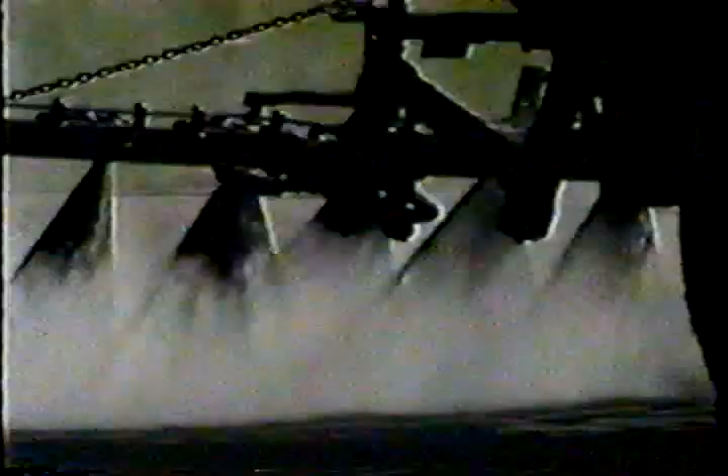For almost as long as there have been roads, there have been professionals responsible for maintaining those roads. Road agent, road supervisor, pavement manager, whatever the title, it never has been an easy job. Though our understanding of how to build better roads has increased and technology has advanced, today's road superintendent faces all of the maintenance problems of his predecessors, plus the pressures of ever-tightening municipal budgets.

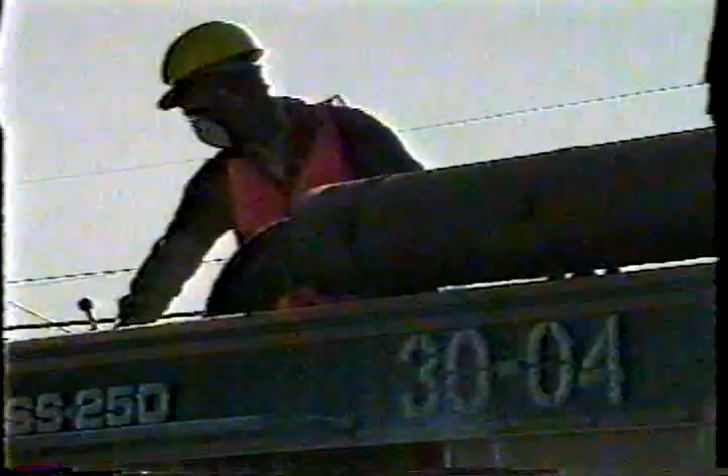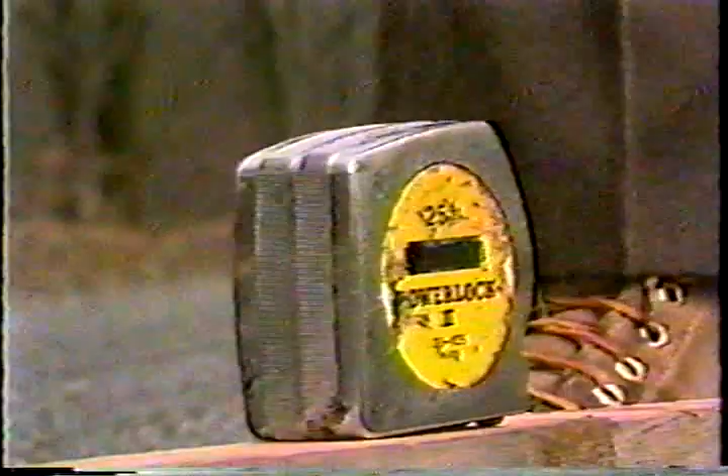To his advantage, he can call upon powerful, sophisticated time and labor-saving tools such as the road reclaimer, high production profilers, the automated paver, and the tape measure. That's right. The humble tape measure is one of the simple instruments vital to the latest road management systems. And these road rating programs are really powerful tools. They provide many benefits to the town while helping the road supervisor perform his job more efficiently.

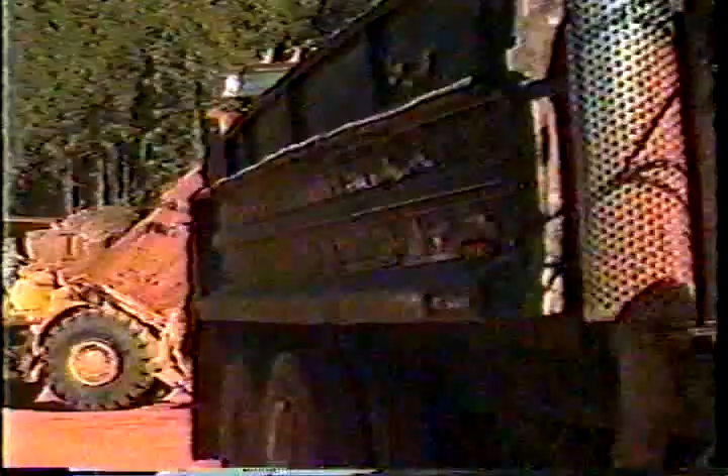Check. I think we have to measure the depth of it so we can get the severity. An inventory of your road system eliminates guesswork. You have a record of every mile of road, and you know what its condition is. You get the information you need to anticipate needed repairs and improvements in your road system. That enables you to make repairs in a planned, cost-efficient manner.

Maintenance needs are documented in specific numbers. You can demonstrate to town officials where road problems exist and project what they will cost to repair. That allows you to determine a total budget to repair all problems or to show which repairs will be deferred if the budget is cut.

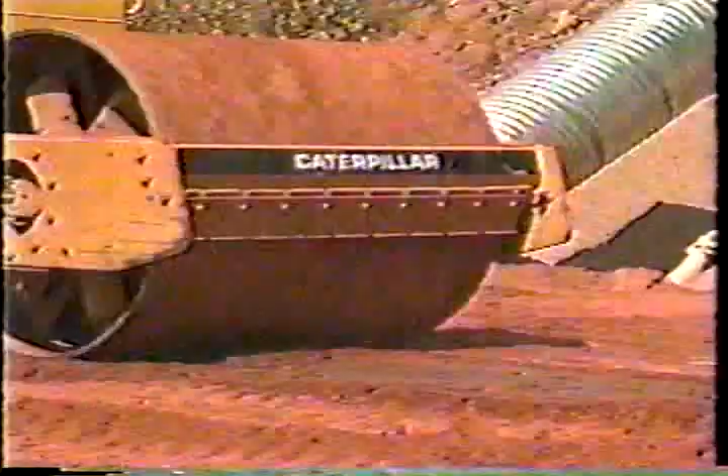Established logical maintenance plans for the whole road network will allow you to resist pressure from individuals who want their road fixed first. Should town officials be sued due to an accident caused by a road maintenance problem, the courts are less likely to award damages when the town is following a documented road maintenance plan. So road management systems make sense for many reasons.

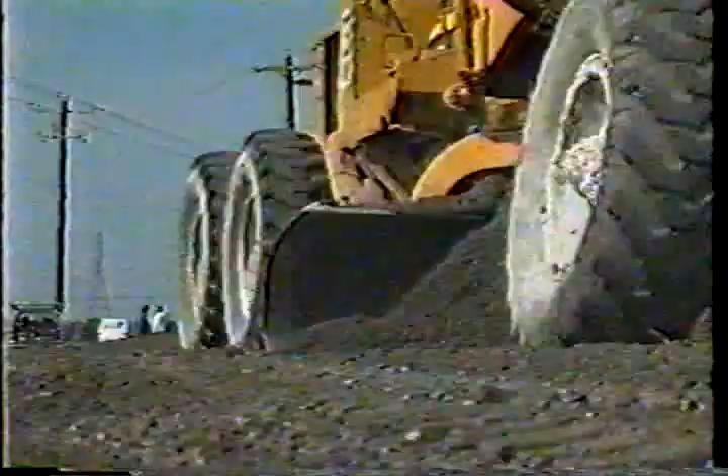But what's involved in putting such a plan together? There are several steps to be followed carefully, and a nominal software charge, but nothing terribly difficult. The rest of this tape will show you how to use a management system for unsurfaced roads that has been developed by the U.S. Army Cold Regions Research and Engineering Laboratory. It's called the Unsurfaced Roads Management System. The field manual, Rating Unsurfaced Roads, will give you even more detail if you decide to use the program. At the end of this video, we'll tell you how to get more information.

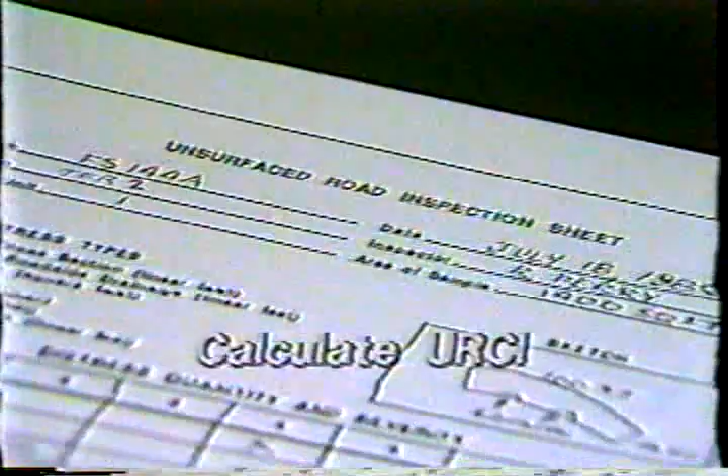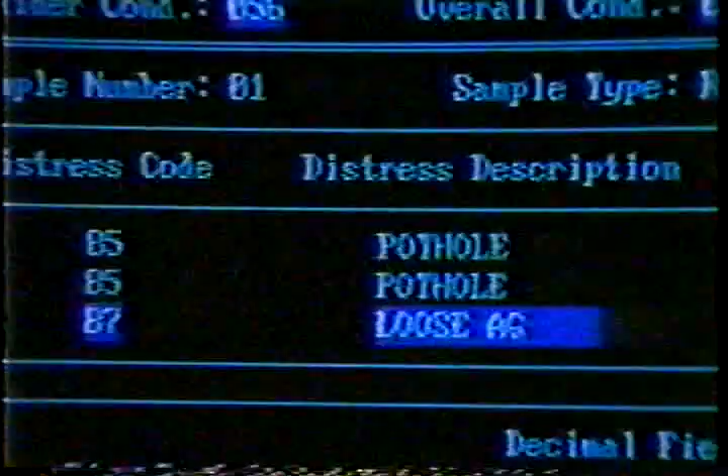In a nutshell, here's how the program works. First, roads are divided into representative sections called sample units. Next, all the problems within these sample units are measured and noted. Then, with these measurements as a basis, a few simple calculations yield a number for each sample unit called the Unsurfaced Roads Condition Index, or URCI. Usually, the superintendent's role is to choose the sample units and do the calculations. The road crew does the actual measurements.

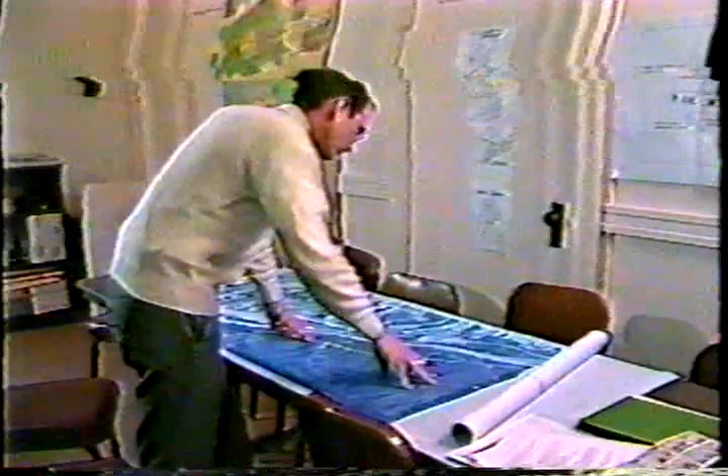Now, let's take a closer look at the process. First, we need to choose our sample units. This step takes some patience. It must be done carefully, but it's only done once since these same sample units will be studied yearly. Start with a map of all of your roads. To make sure that the sample units are truly representative of all of your roads, we will go through a three-step process.

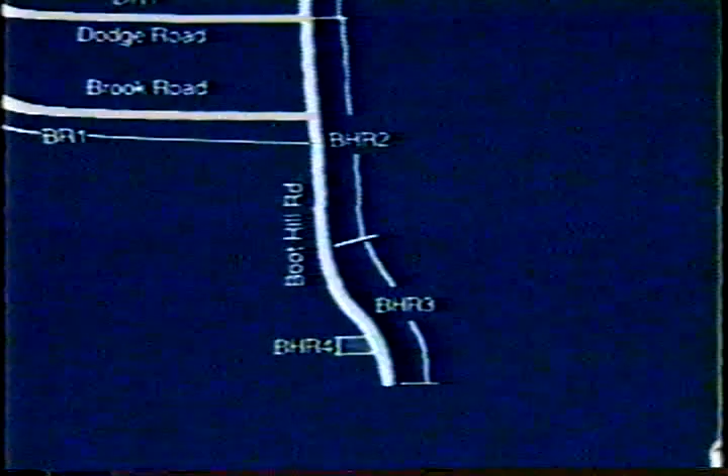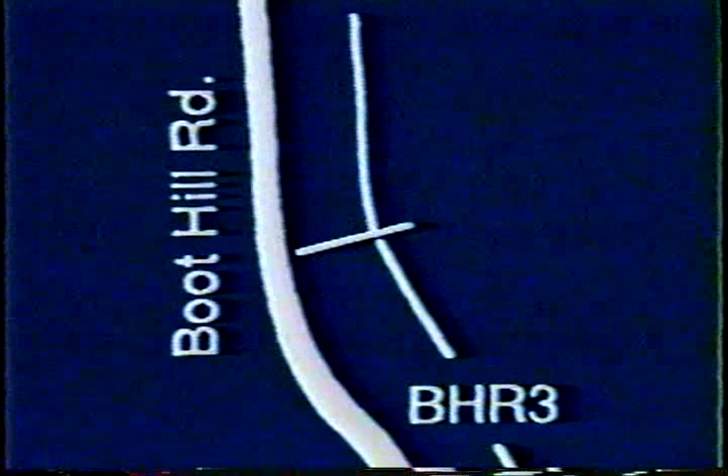First, branches. Divide your roads into major recognizable units. In many cases, these will be entire roads. Identify branches with existing names whenever possible. Here we call Boot Hill Road BHR. Next, sections. Sections are parts of branches where road conditions are uniform. For example, Boot Hill Road shows 4 sections.

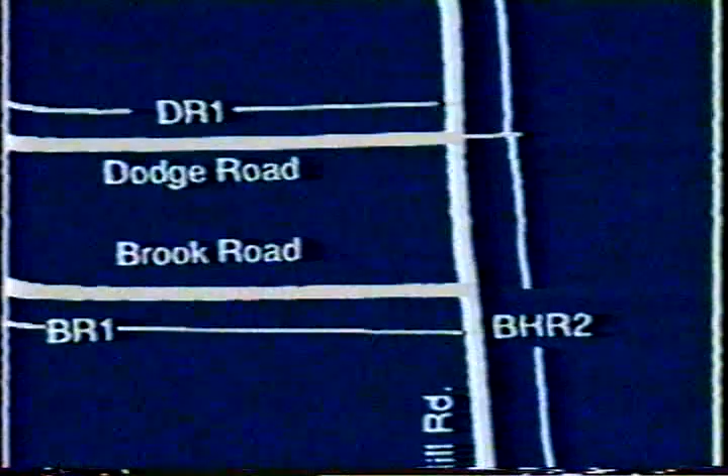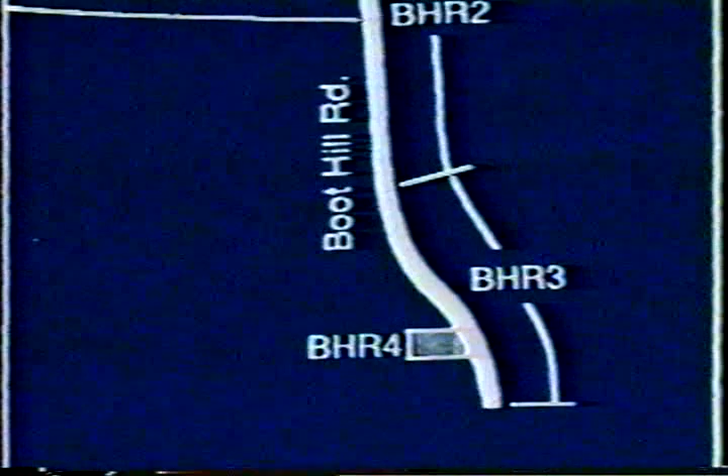BHR 1 is a mile-long gradual hill, pretty much the same throughout. After the intersection with Dodge Road, there is less traffic, so we call it BHR 2. BHR 3 has still different characteristics because it runs through a poorly drained area, and BHR 4 is a parking area for the town pond. Once you've chosen the sections, label them clearly on a map.

Finally, we divide the sections into sample units, where conditions will be studied. In general, sample units are about 100 feet long, and you will want to take detailed distress measurements on about 2 of these per mile. Mark your sample units well, both on maps and with permanent stakes at the site.

This stretch of BHR 3 has a problem with potholes, so we chose a sample unit that includes some of the potholes and some of the good road. The field manual will give you more details about making these divisions.

With all sample units selected, mapped, and marked, measurement may begin. As with any scientific procedure, consistency is vital. Be sure that your crew understands the importance of their surveys. Observations should be made at the same time each year, when the roads are in their best condition, and data must be gathered in a consistent fashion from year to year and from crew to crew.

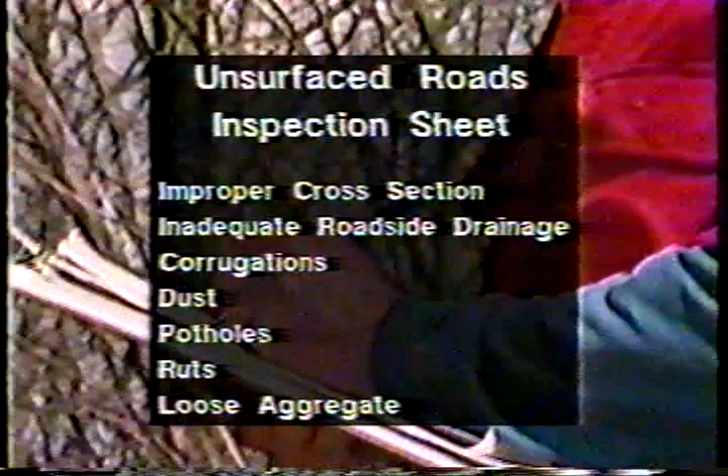As the crew makes measurements, they fill out an unsurfaced road inspection sheet. They will measure 7 distress types for quantity and severity. With this information, you will be able to calculate a rating called the Unsurfaced Road Condition Index for each sample unit. This index, based on careful measurement, gives you an easily understood profile of the condition of each road. The calculation may be done manually or with a computer program called PAVER.

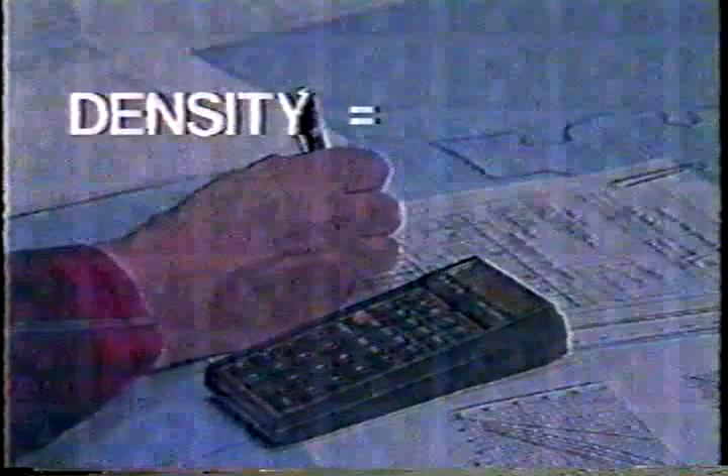To perform the calculation manually, refer to the unsurfaced road inspection sheets turned in by your crews. Start by determining density of each distress type. Divide the amount of the distress by the area of the sample, then multiply by 100. Here you have 100 linear feet of improper cross-section, and the total area of the sample unit is 1,800 square feet, so the density is 5.6.

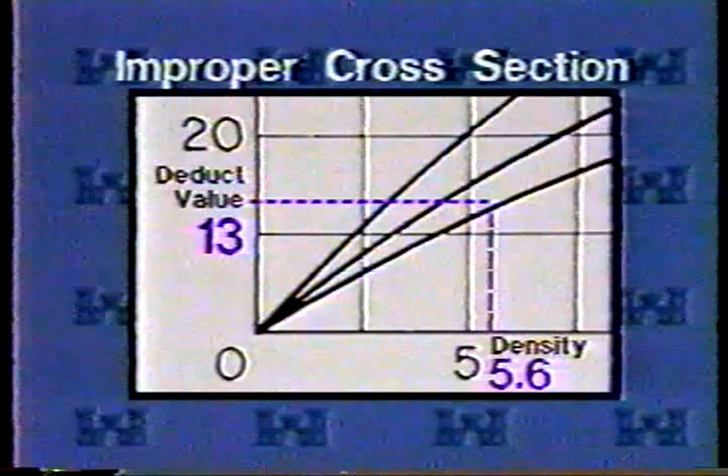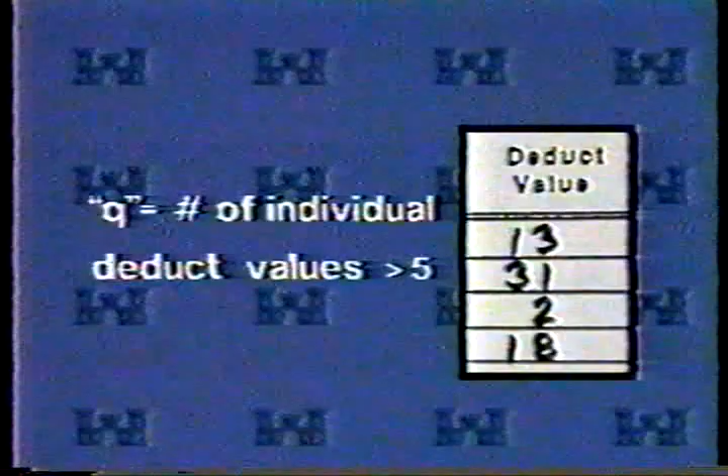Next, refer to the curves in the field manual for each distress type. An improper cross-section of low severity with a density of 5.6 yields a deduct value of 13. When you've determined all of the deduct values for the sample unit, add them to get the total deduct value. Here it's 64. The number of individual deduct values greater than 5 determines the Q value. Here we compute a Q of 3.

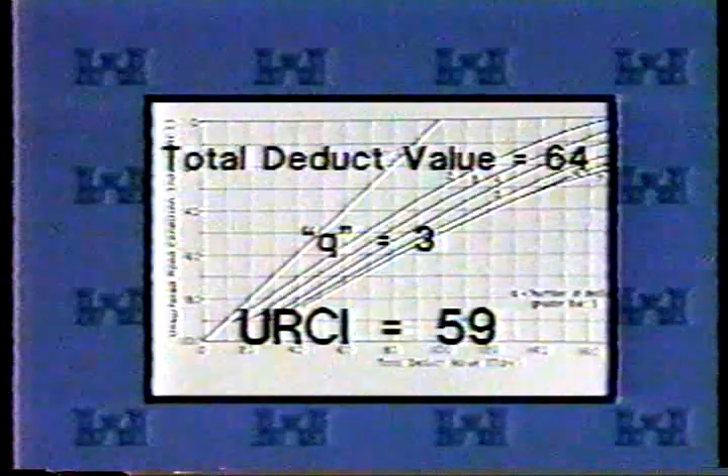Relating these two figures to the URCI curve, we find an unsurfaced road condition index of 59 for this sample unit. A section total is the average of all the sample units in the section, and the rating for the whole system is the average of all sections. See the manual for more detail.

Now, how do we utilize this figure? Well, you may use the URCI to develop priorities for maintenance. If you set an overall target index of 65 and your current rating is 50, you can use the index to determine which roads you should improve with available funds. Since all improvements will probably not be completed this year, the data is useful in justifying next year's budget. The index also gives you a basis for projecting future requirements and tracking road deterioration with time.

When the program has been in place for 2 or 3 years, you will know what maintenance practices work best on your roads and what they cost. This data will make budget forecasting easier and more accurate. These are just a few of the ways that this management tool will help you to do your job better. As you become accustomed to using the system, other benefits will become apparent.

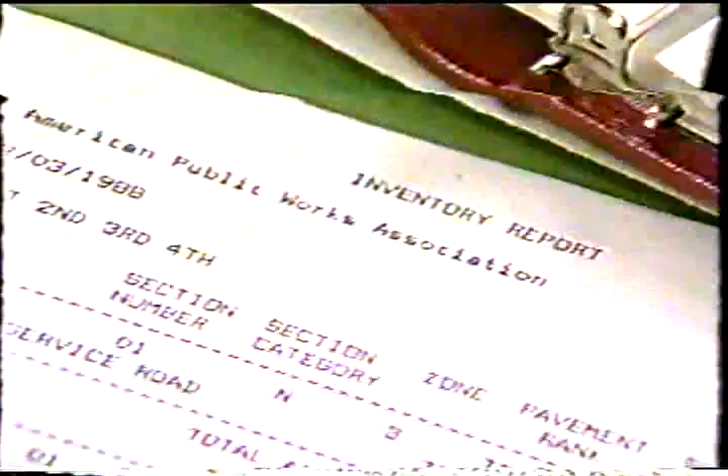The best way to keep ahead of road problems is to use a pavement management system. This videotape will show you how to take measurements for the Unsurfaced Roads Management System. It's a tool that will help your road department actually see into the future. Road maintenance will be planned more precisely. It also helps you to be more efficient on a daily basis and tracks the information needed to show townspeople that you're doing the best job possible. The system is the product of several years of research and development by the U.S. Army Cold Regions Research and Engineering Laboratory.

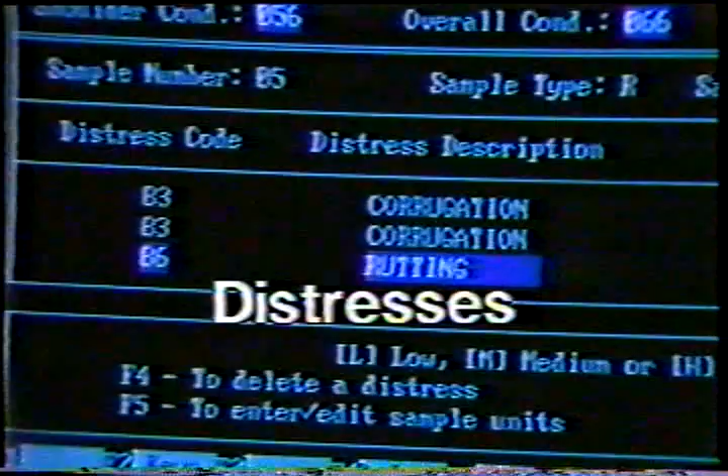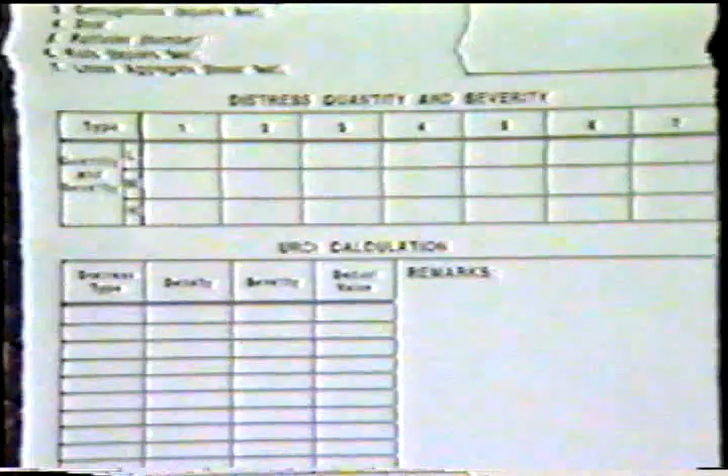Your accurate measurements are the most important part of the system. In this tape, we will show you how to measure and record 7 road problems called distresses. This field manual will be an important guide for you. In the back of the manual is an inspection sheet. This is the form you'll use when you measure the distresses. The areas where you will make measurements, called sample units, have been marked for you.

Your inspection involves measuring all of the distresses in the sample unit. They are improper cross-section, inadequate roadside drainage, corrugations, dust, potholes, ruts, and loose aggregate. Let's look at the proper measurement procedure for each of these.

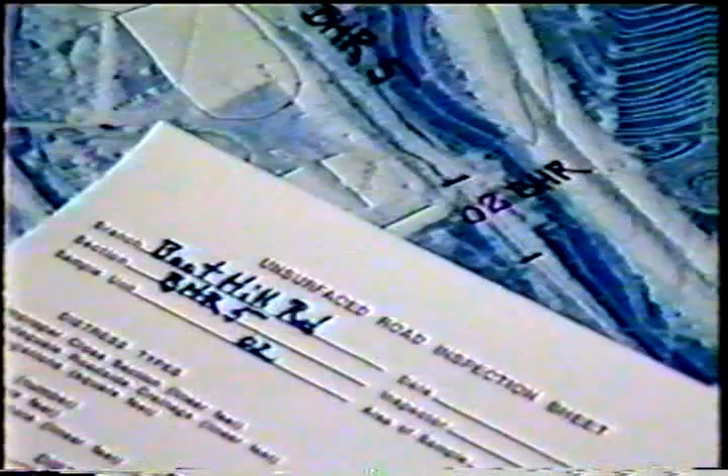Start by filling out the information at the top of the inspection sheet. You'll find the branch, section, and sample unit information on a map that's already been prepared. Be sure to fill in your name and the date. Then start by measuring the area of the sample unit. That's the length times the width from one shoulder break to the other. Make an overhead sketch of the unit showing areas of problems and road features such as culverts.

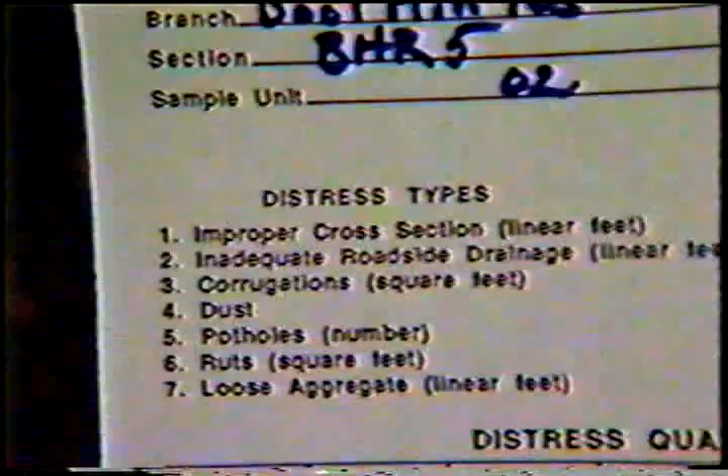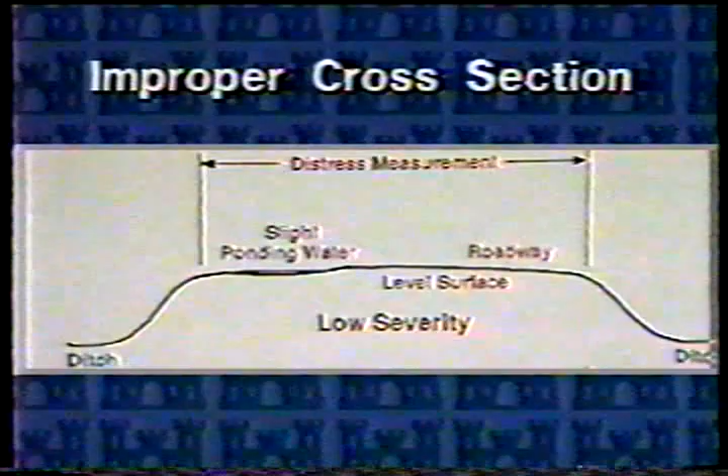First, let's look at improper cross-section. As you know, a proper cross-section looks like this. It has sufficient crown, or bank on curves, to carry water to the ditches. Even a slight ponding of water indicates improper cross-section. Here, the road surface is level, and there's evidence of a small amount of standing water on the surface. This is called low severity.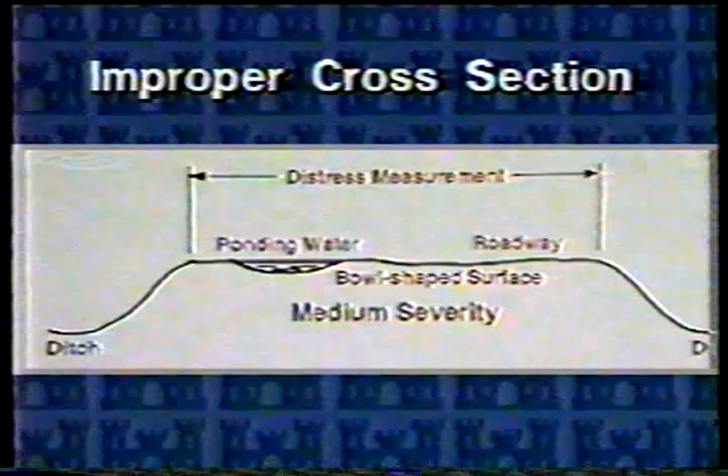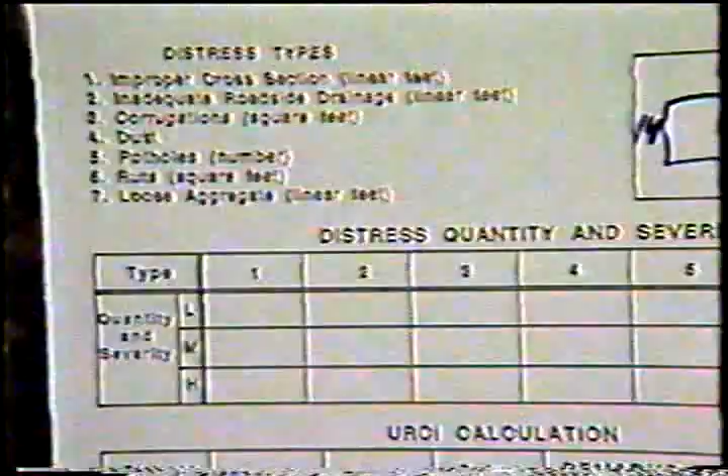When there's a slight bowl shape or evidence of a moderate amount of standing water, we call it medium severity. Evidence of a lot of standing water or the presence of severe depressions puts it into the high severity classification. To measure improper cross-section, use a straight board. This is medium severity. The critical measurement is the number of feet of each level of severity. Here, the sample unit has 40 feet of medium severity and 20 feet of low severity.

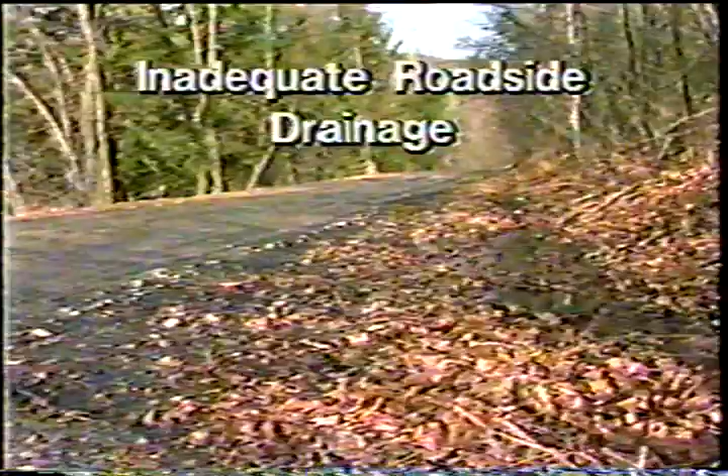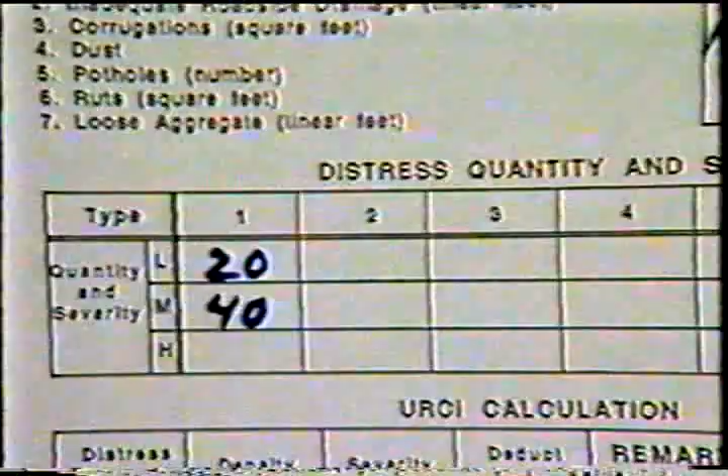Next, we look at inadequate roadside drainage. When ditches and culverts fail to carry runoff, pools form alongside the road. The presence of these pools can weaken the road, or they may drain across the road carrying surface material away. Look for ponding of water or evidence of ponding water, and also for overgrowth or debris in the ditches. Again, you need to record the length of the problem in feet. This sample unit has 15 feet of medium severity, and beyond that 30 feet of low severity. Refer to the field manual for help in judging severity level.

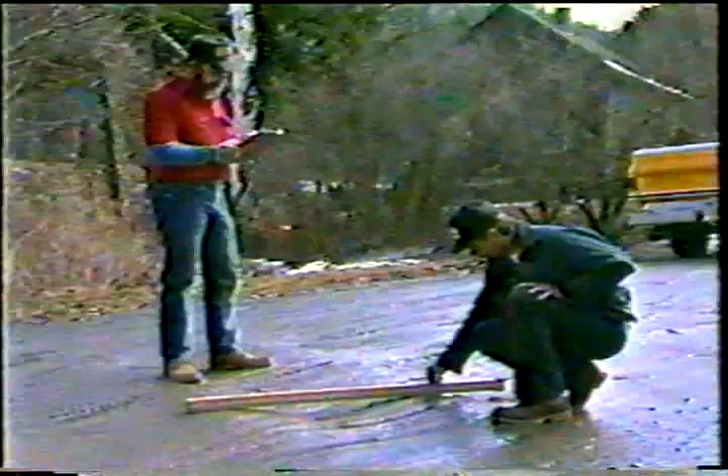Number 3 on the inspection sheet is corrugations, or washboarding. We measure these by putting a straight board across the top and measuring depth. Severity is indicated by the distance between the high and low points of the corrugations. Record the area in square feet at each level of severity. This sample has 126 square feet at the medium severity level.

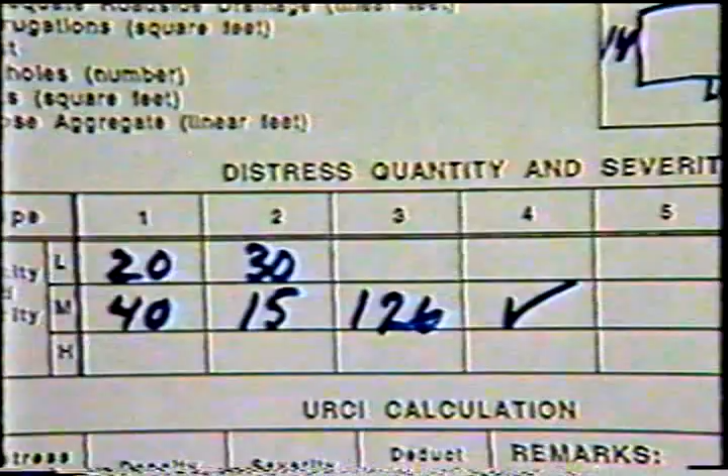To measure dust, just have someone drive through the sample unit at about 25 miles per hour and observe the dust cloud. This sample has a medium severity. This is a single rating for the whole sample. Check the appropriate box.

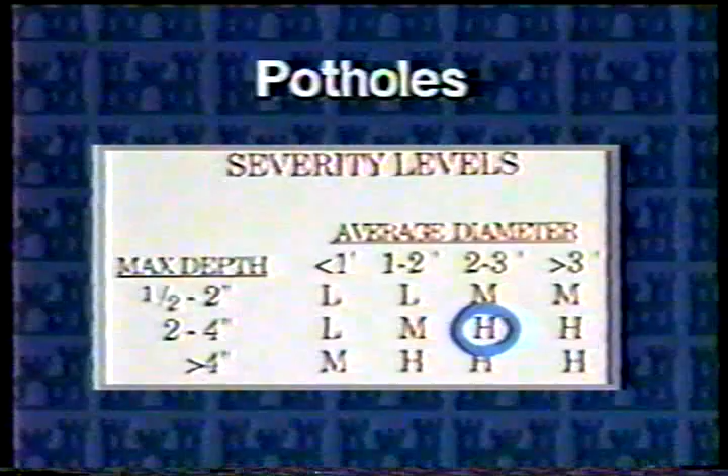Potholes are a familiar sight. First, measure their diameter and depth. This one is 3 feet in diameter by 3 inches deep. Next, refer to the table in the field manual to determine severity. So, here we get 1 at high severity. Record the total number of potholes for each severity.

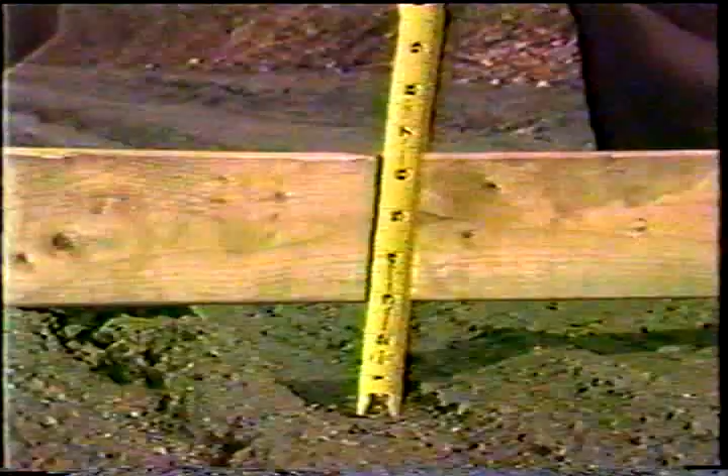Again, using our straight board and tape measure, we classify ruts. These ruts are about 3 inches deep, so they're of the medium severity. And with a dimension of 4 feet by 10 feet, we record a total area of 40 square feet in the medium column. If there are ruts of any other severity, we record the total area of those as well.

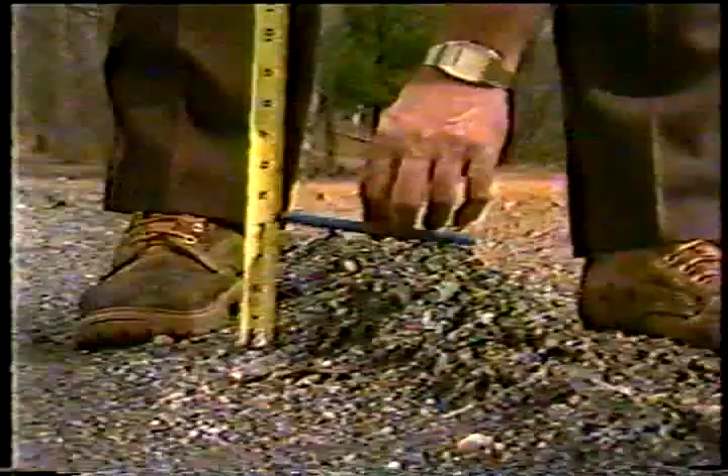Finally, loose aggregate is the rock, sand, or soil that builds up into ridges along the center or sides of an unsurfaced road. The height of the berm is the key to its severity. Measure this, check the table in the manual, and then measure its length. In this case, the sample has one berm at medium severity, 20 feet in length.

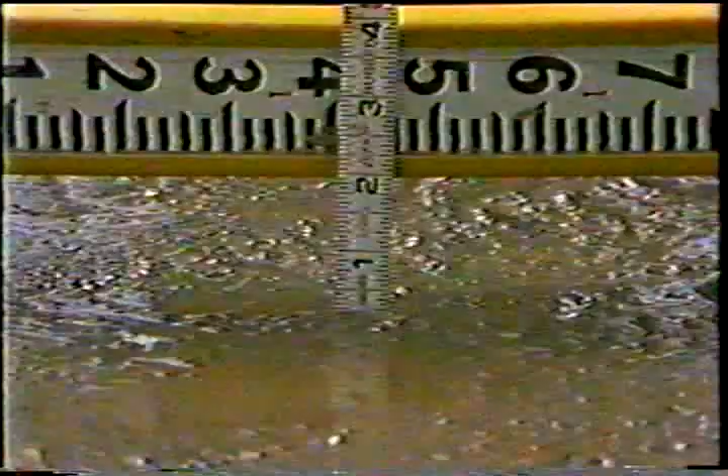You'll no doubt run into situations where it'll be difficult to tell which distress is which, or several may occur together. A sample with improper cross-section may also have potholes and ruts. In this situation, use your best judgment. Decide which is which, and then measure each distress separately. The system is flexible enough to give an accurate rating under most circumstances. With experience, spotting the different problems will become much easier.

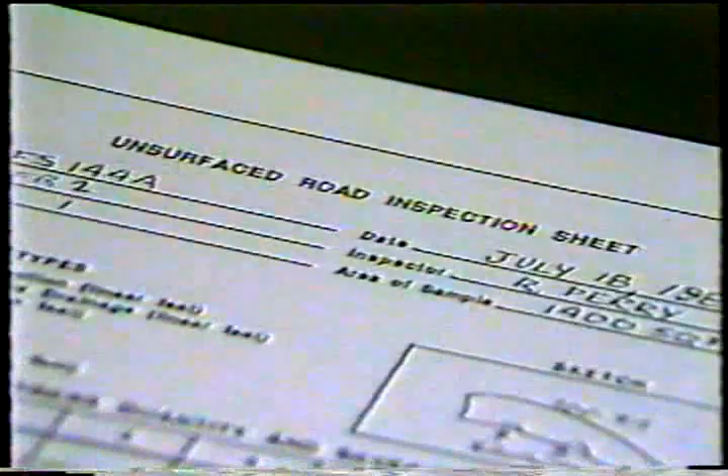That's it for measurements. Your numbers will now become the basis for calculations to be performed back at the office. The final result of this process is a solidly based maintenance program. The importance of your careful measurements can't be overstressed. With your help, the Unsurfaced Roads Management System will provide the information needed to maintain and improve your roads at the lowest cost. Instead of reacting to the disasters that Mother Nature, Father Time, and your unpaved roads cook up for you, you'll have a sound maintenance plan to refer to year-round. That's a goal worth working for.

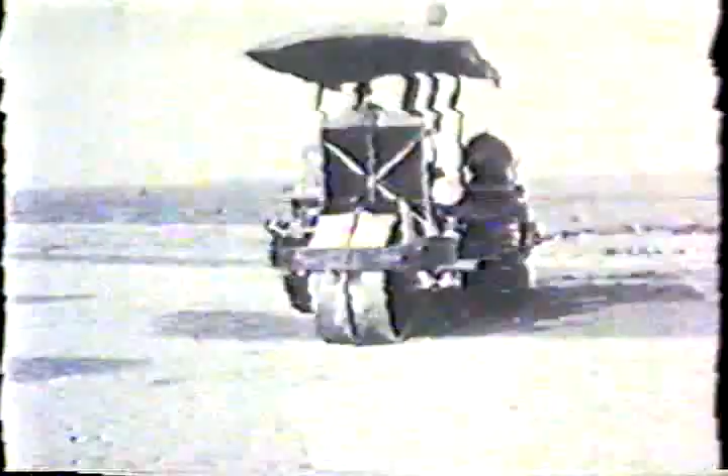Our first roads were the cart paths worn along the route of least resistance through our towns. Often, a trip of 25 miles was a day-long journey. If travel was a challenge, so was the task of maintaining and improving these public ways. Since the turn of the century, however, the tools designed for this work have grown steadily more powerful, more time- and cost-efficient. But even with our current knowledge of paving theory, and with sophisticated equipment to carry it out, there remain many challenges to efficient road maintenance.

The people responsible for this task are caught in a bind. Town officials and road superintendents are mandated to keep roads in good condition, but their budgets are tight and getting tighter. They find themselves reacting to the worst road problems as they occur and as the budget allows.

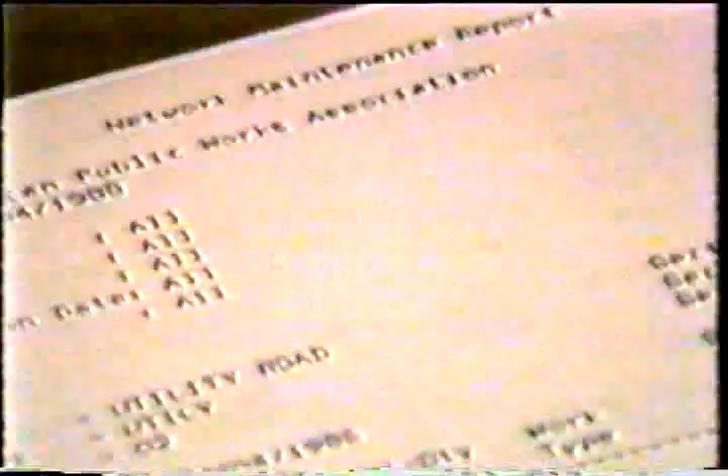With this predicament in mind, another road maintenance tool enters the picture: the Pavement Management System. In the simplest of terms, this system helps you to gather and organize information about your roads, and then to analyze that information. These systems can tell you which roads need help first, which ones are getting better, and which are getting worse. You will make better decisions about how, why, and where to spend your money. And the perspective gained helps you to improve your whole road system with available resources.

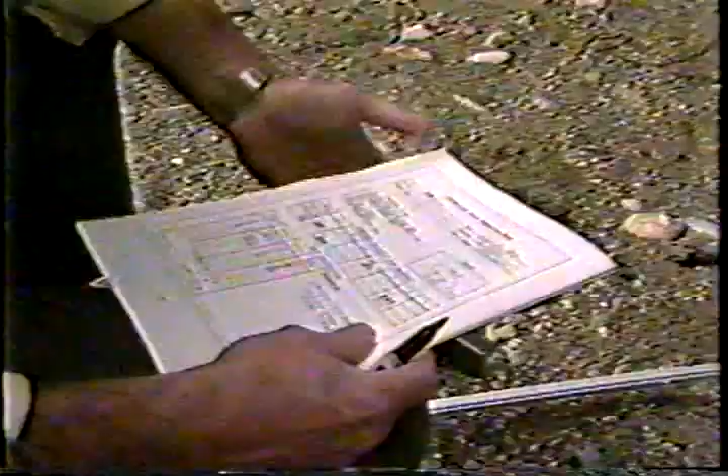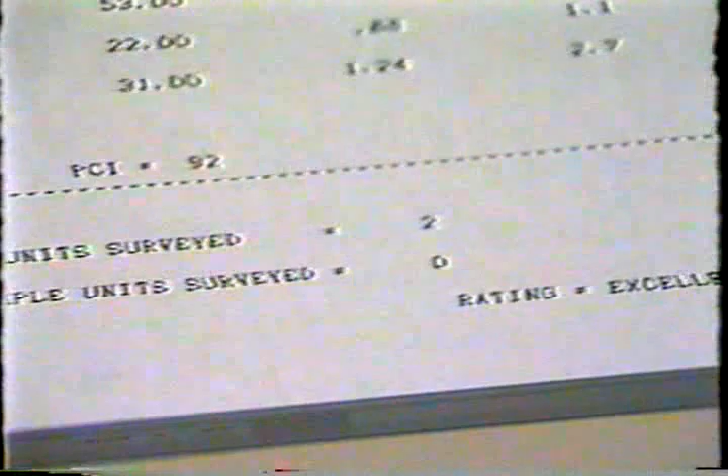One system, which is being used successfully by over 150 cities and road agencies, is called PAVER. It was developed by the U.S. Army Corps of Engineers after several years of careful study. PAVER starts with a complete inventory of your roads, both the extent and condition. This information is then entered into your computer, and PAVER's analysis helps you with ranking, budgeting, and forecasting. It doesn't require outside consultants, and it doesn't require a large database.

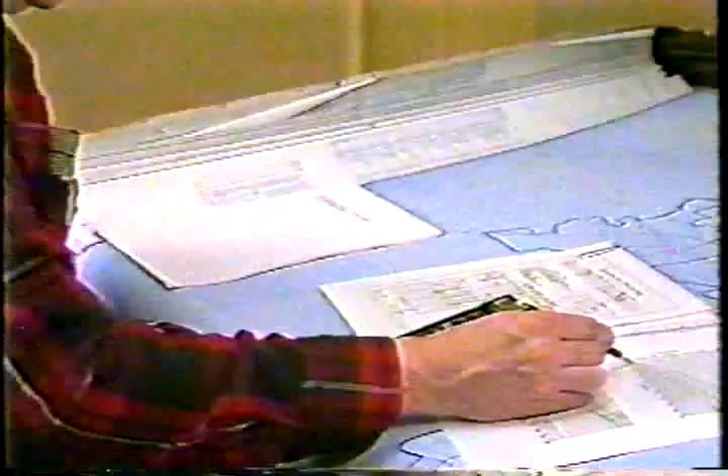There's also a system called MicroPaver for use with microcomputers. It allows road supervisors to use PAVER right in their offices with very little training. Calculations can even be done manually if no computer is available.

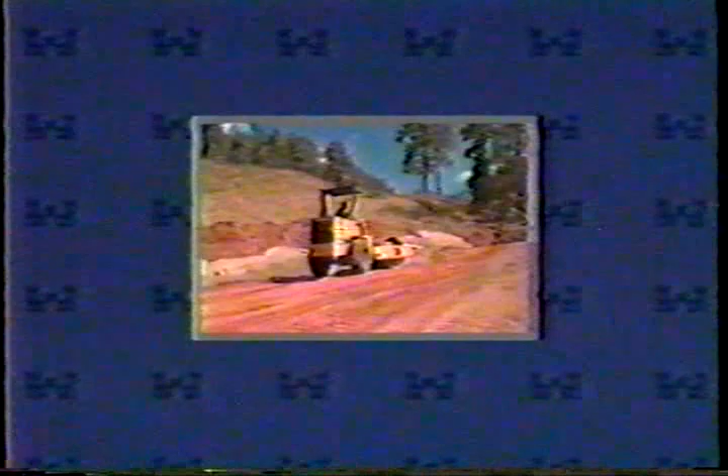Since over 75% of the roads in this country are unsurfaced, the Corps of Engineers has also developed a system for the management of these roads. Used in conjunction with PAVER, the Unsurfaced Roads Management System gives you the information you need to track the condition of your unpaved roads.

PAVER has proven to be a true money saver. The city of Tampa, Florida began using the system in 1982. Today, officials estimate that PAVER saves the city approximately $1 million each year. So PAVER can be counted on to help you get the most for your money. But there are indirect benefits too.

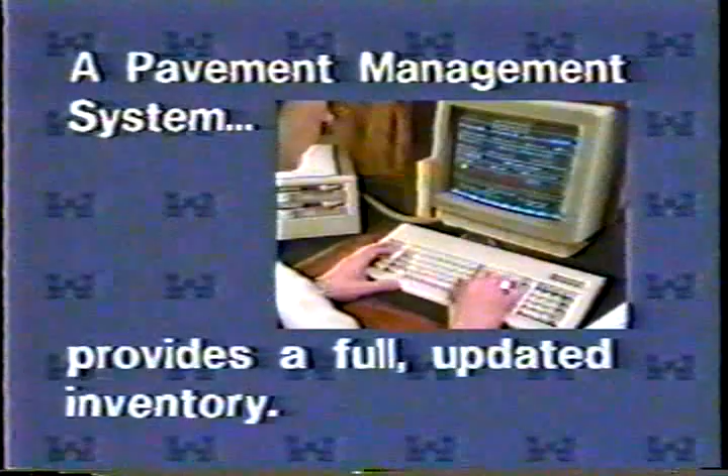A proper road inventory is indispensable. You can manage much better when you have at your fingertips a full and accurate account of your roads. An inventory will also help you to secure state and federal funds. Your road conditions will be documented in objective terms, not an observer's subjective judgments.

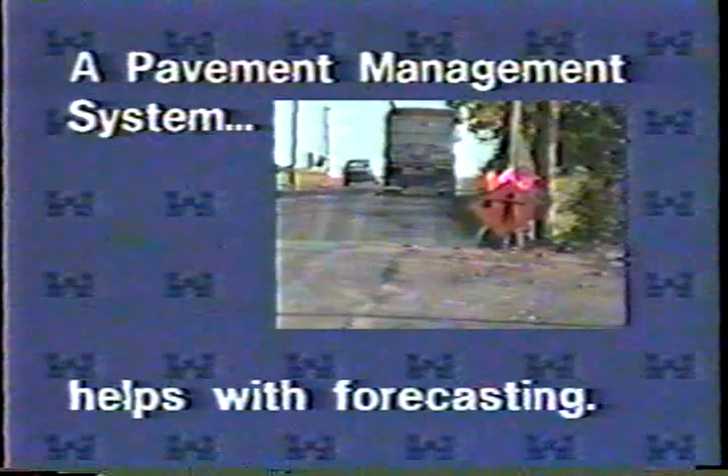These objective measurements and records mean that if your road superintendent leaves or is unavailable, your road maintenance program can continue uninterrupted. Your road maintenance plan may be explained and justified to anyone with hard numbers. And you'll be able to develop forecasts of future road conditions based on known deterioration rates and the maintenance alternatives.

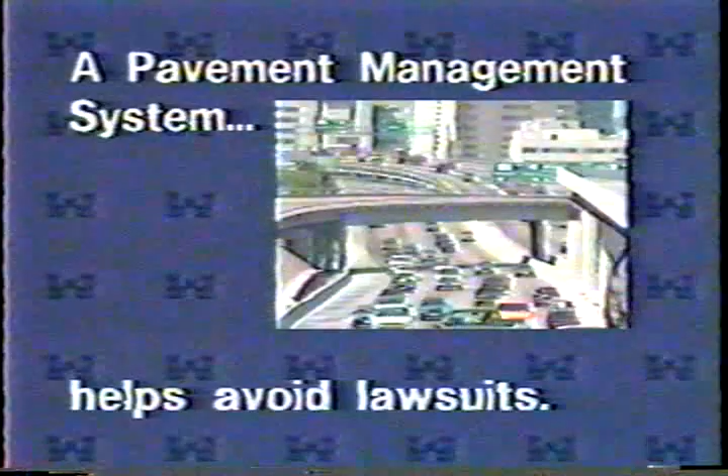In the unfortunate event that town officials are sued because of an accident caused by a road maintenance problem, the courts are less likely to award damages if the town was following a documented road maintenance plan. The investment required to initiate a pavement management system is small relative to your whole road budget, and annual costs after the initial survey include only updating those inventories.

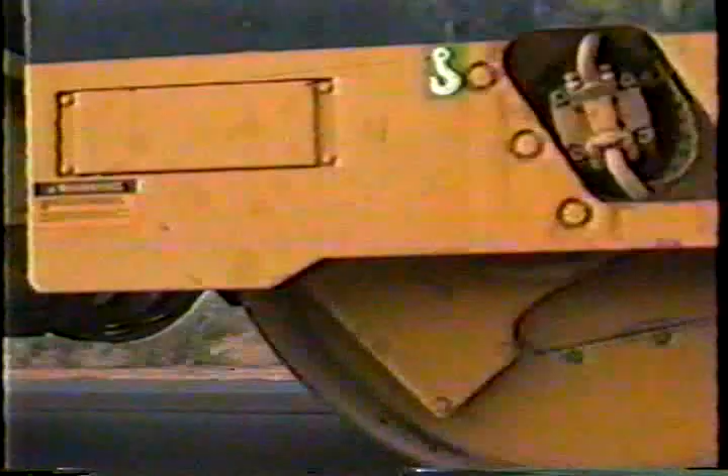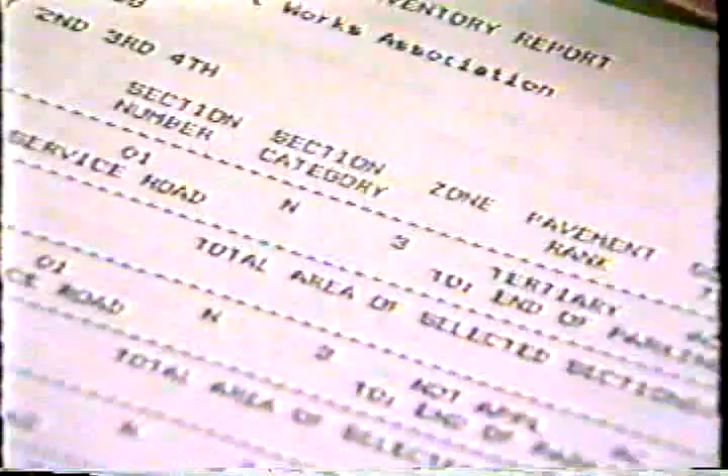Pavement management systems are receiving wide support nationally. The Federal Highway Administration has directed each state Department of Transportation to develop or adopt a statewide pavement management system. The idea is spreading. Many regional planning commissions and counties have already adopted plans. So, when you find yourself in the time and money crunch of too much road to fix and not enough money to do it with, take a serious look at road management.